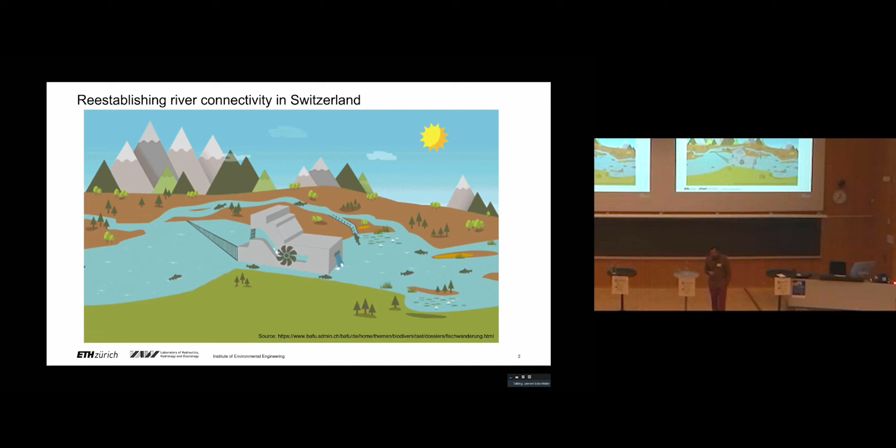So that's the idealization of the future scenario until 2030 in Switzerland. This beautiful landscape where you have hydropower plants installed, but at all of these plants you would have both upstream and downstream migration of fish freely through the river system. That's the idealization scenario since the Swiss Water Protection Act has been put into force back in 2012, if I'm not mistaken.

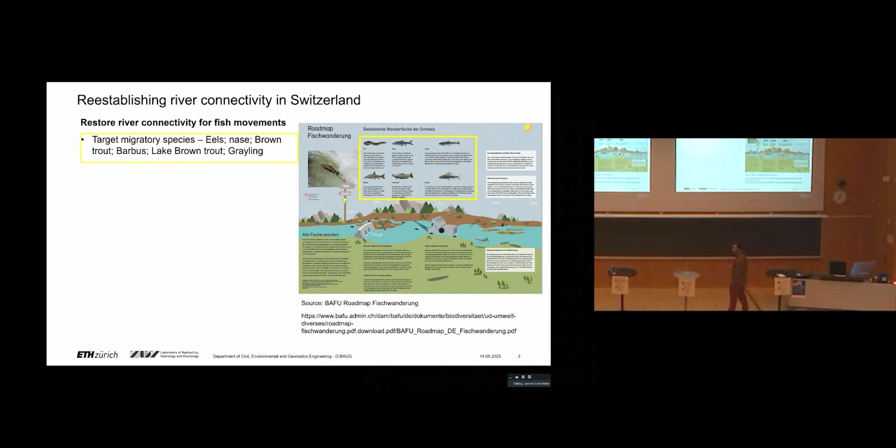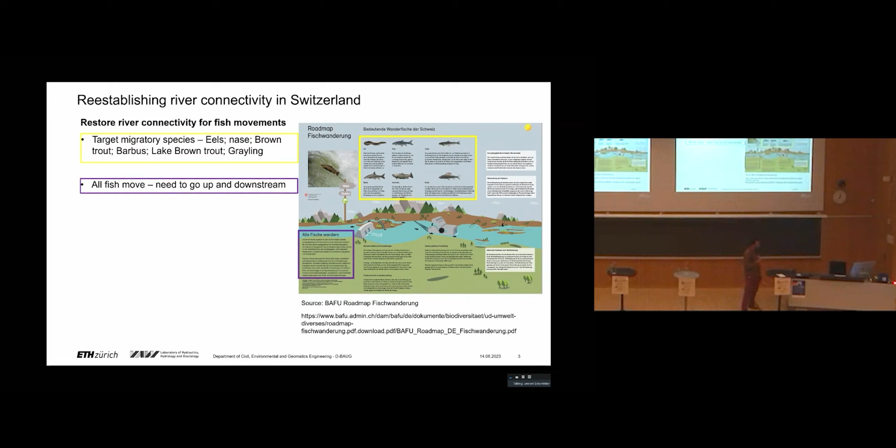So based on that, we do have a lot of challenges in the system now, and that's what the Swiss Federal Office for the Environment is predicting, that basically we need to restore river connectivity for fish movements. There are 6 species that have been defined as target species for upstream and downstream passage in the system. There are over 500 hydropower dams where connectivity has to be restored. All fish, in the end, have been considered to need to move both upstream and downstream.

They set a series of priorities for the construction and development of these upstream and downstream passage systems based on medium to long distance migrant fish species, and then looking to rivers with at least 1 migratory species. They set the deadline for the cantons back in 2014 to define which dams they would prioritize, and until 2030, all of them have to show efficiency. So that's the challenge that we are facing at the moment.

For example, back in 2014, the beginning of these studies with bypass designs at VAW to then define what type of downstream guidance systems with bypass would be installed. So you see that there was a mix of research at the beginning to inform decision-making plus a deadline to be met. So that's a very ambitious deadline that we are dealing with.

There we go. And one of the key points, in my opinion, and things that we've been working on, and I believe one of the key issues related to fish passage in the end, is how we define target setting and monitoring goals for these different passages. So a demonstration of efficiency is then going into this big bucket of how we set efficiency, how we define target setting, what are the aims of the different fish passages at different locations.

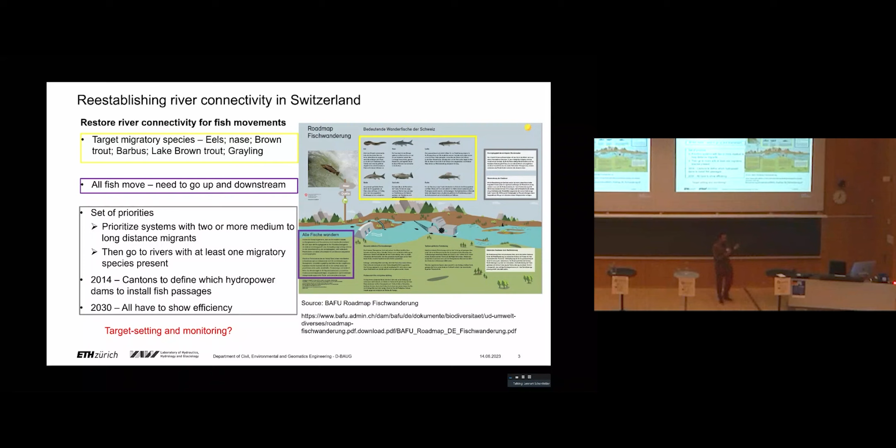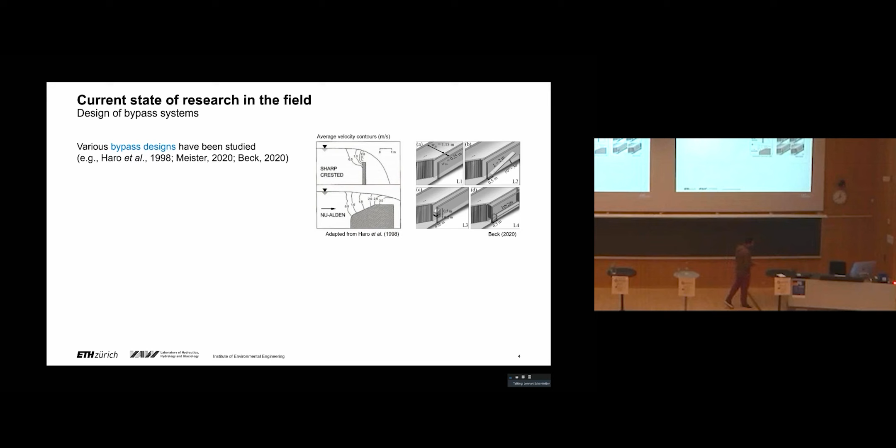So based on that, we are dealing with a practical problem, but we dove into, okay, if we think about downstream passage design, what are still the relevant scientific questions that we can incorporate into the practical information that we need to provide? And this then took us into this short review that is under development to look into bypass designs that have been studied. There is a lot of information on that. We all know from different guidelines some of the parameters that are considered in these bypass design systems.

If you look into the design, in the first bullet point there, the ratio of the bypass discharge, you have between 2 and 10% that could be considered. Another variable is the average approach or average flow velocity in the bypass itself, set between 0.3 to 1.5 meters per second. And then the ratio between the bypass velocity and the approach velocity or approach velocity, between 1 and 2.

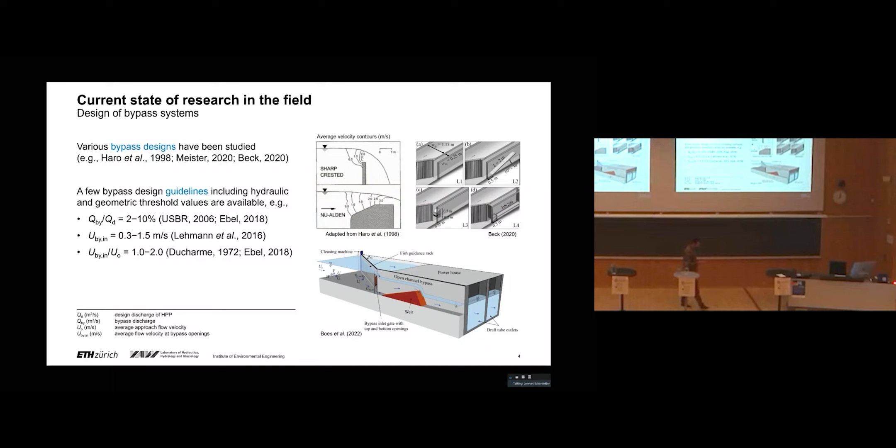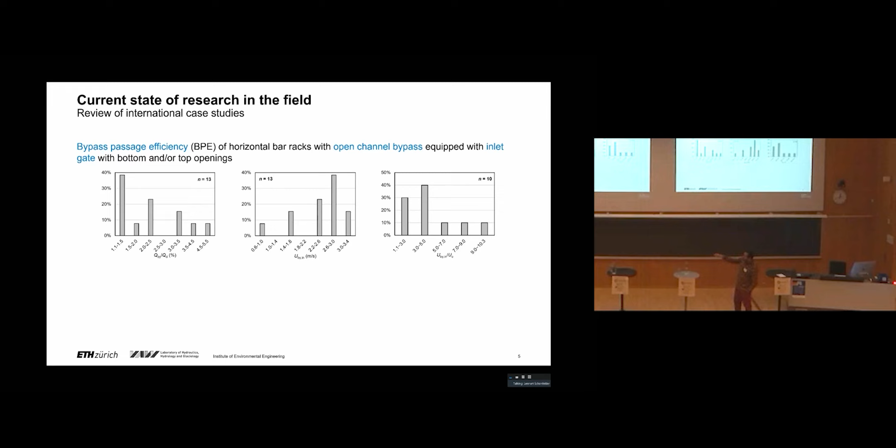So this has been set in guidelines, but when we look into practice and the recommendations that have been implemented, this is the number of studies that Max looked into, and where they sit in terms of the different variables that were considered for design. You can see that when we assume the ratio of the bypass discharge to the total discharge at the dam, quite a lot of studies were implemented above what the guidelines define.

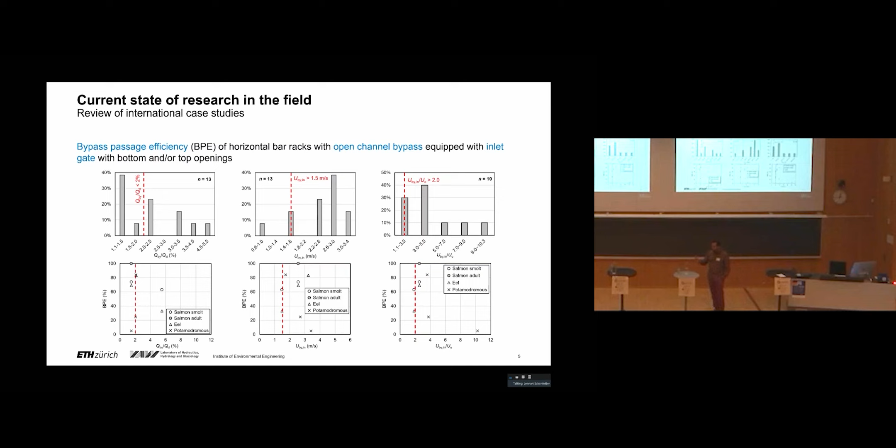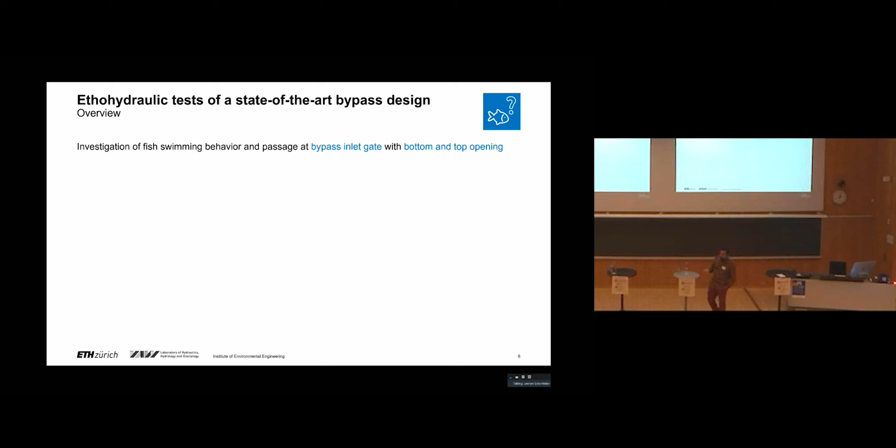Is that a problem of the different variables? Like we can see that in nature, in reality, some of those values were falling outside of the thresholds that were set. Then we set out to investigate this a bit more in terms of looking at the bypass inlet gate and the different designs for these gates to see whether there is an influence of the bypass design gate on the passage efficiency for the bypass.

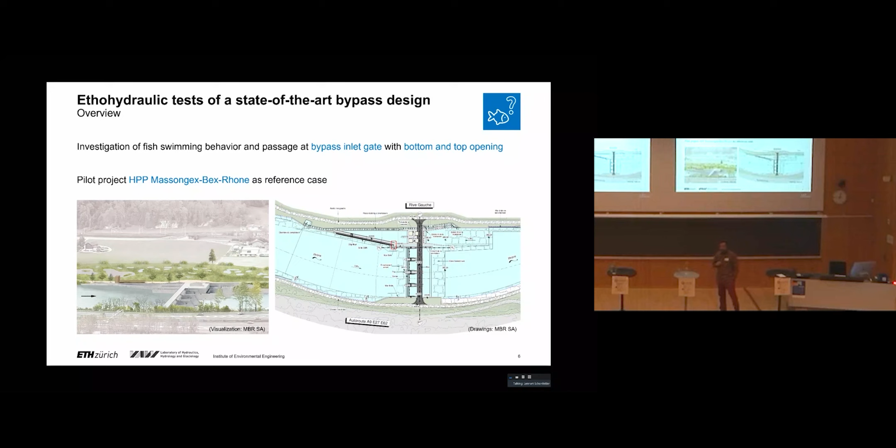We are doing that in reference to a pilot project in Switzerland, close to Geneva. In that project, they are going to install a bypass at that red square over there. That bypass is set out to have a top and bottom opening gate, which are approximately separated in the water column. You can see there that this is a water column of about 5 meters. The top gate would sit at about 1 meter below the surface, and the bottom gate would extend from the bottom up to 1.5, 2 meters from the bottom.

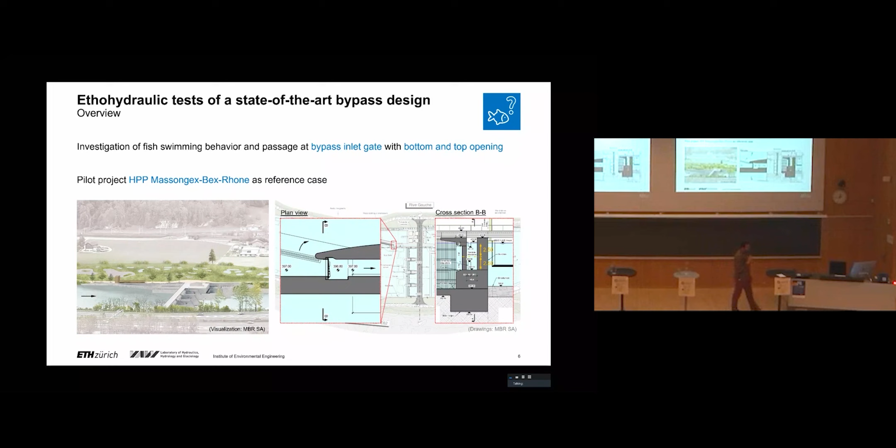So taking that plant as a pilot study, we then moved to our flume at VAW, at the Laboratory of Hydraulics, and we set up an experiment there to test the bypass gate opening. So we have the flume here with the dimensions of the flume. In the flume, we installed a bar rack, a fish guidance rack, to guide the fish to the bypass. It's very important here to understand that we assumed that the rack would have 100% because our focus was on the bypass inlet design.

Therefore, in the bypass, we installed a screen to avoid fish moving through the rack, and all of the fish would be guided to the bypass because, again, our aim was to understand the bypass design. So that's one assumption that you have to keep in mind. Then at the design, we put a gate, and the gate is generally there to reduce the discharge through the bypass and for operational reasons.

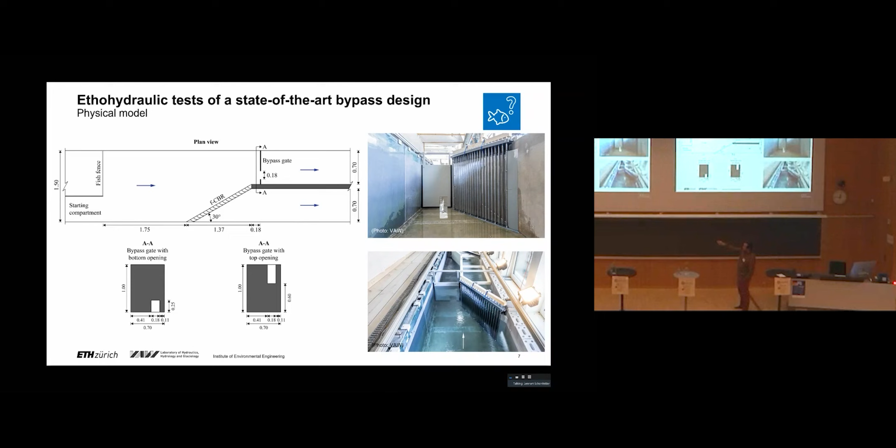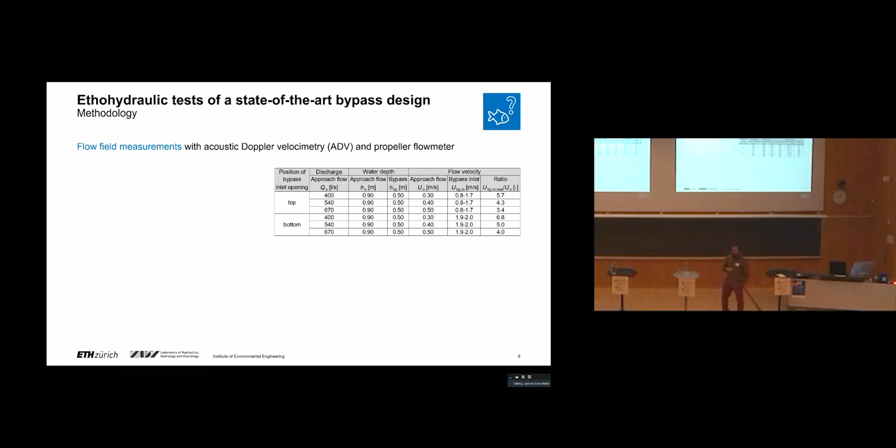Then we changed the gate with bottom opening or top opening and exposed different fish species to 6 different treatments. So we had the top opening with 3 different bypass ratios, and the bottom opening with another 3 bypass ratios. We tested barbel and trout in these settings. We had about 4 weeks of testing, 8 replicates, 3 different groups, not going into the details of the methodology here, and we can discuss later on.

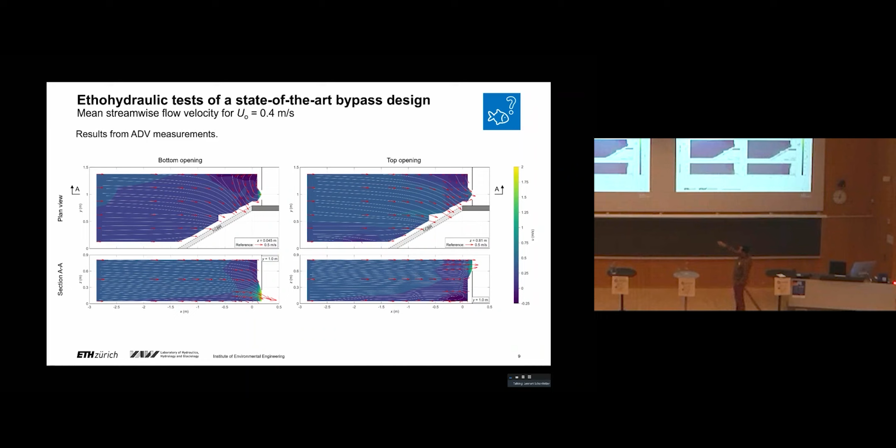We also conducted a series of hydraulic measurements to model all of the different hydraulic scenarios to understand how the flow velocities were behaving. We can see here from the bottom opening and the top opening approach that in the bottom opening, there's some recirculation zone and then a high velocity through the bottom opening here. So you have increased velocities going through the bypass. The top opening also increased the recirculation zone and the flow through the bypass.

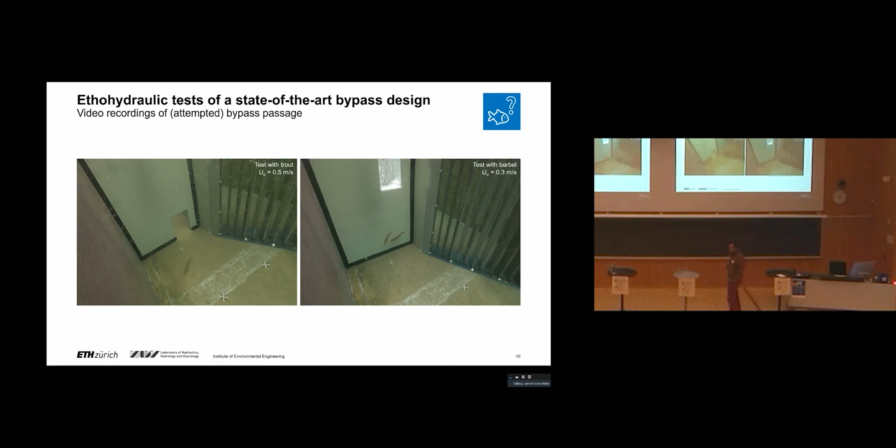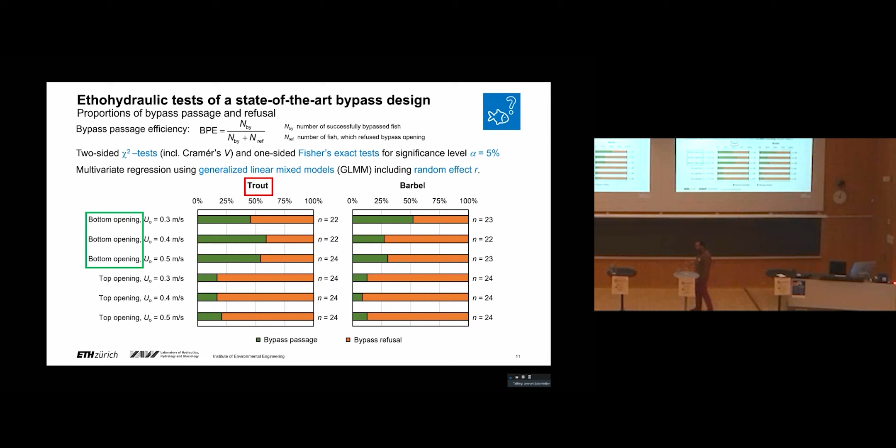So to conclude, as the flow velocity increased sharply at the top and bottom openings of the bypass, trout and barbel often showed an avoidance behavior to the high velocity gradients. The preferred hydraulic conditions are species-specific, as we saw as well. Overall, trout showed higher and faster bypass acceptance or efficiency compared to barbel, which highlights the need for us to understand more of the behavior and response of these fish to these different designs before we implement them at different locations.